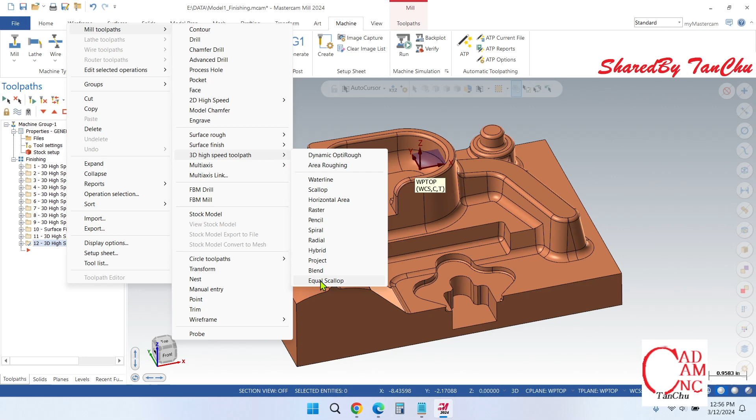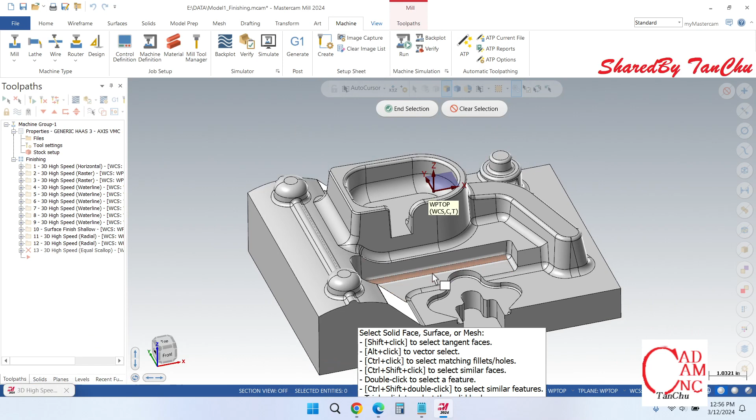I would like to machine this surface, the surface on the top only, and I will select Ctrl A for all surfaces for avoidance, and for the machine surface we select that surface and select it.

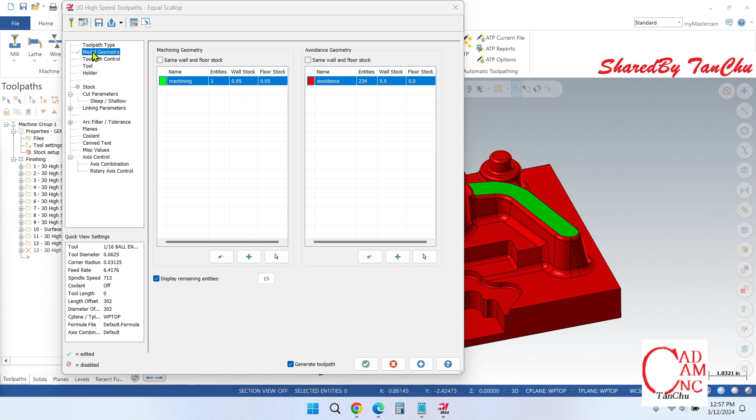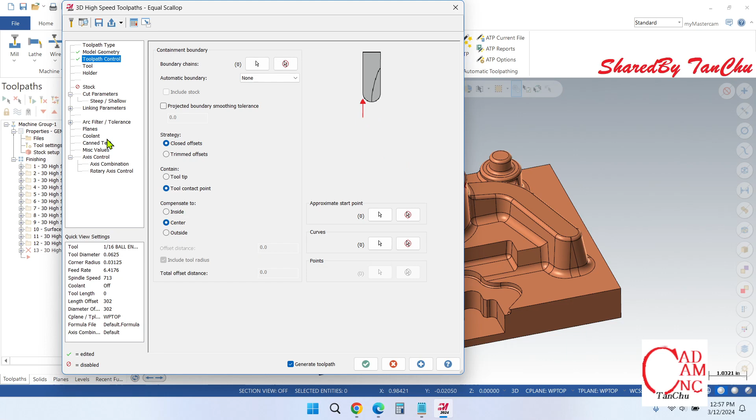The tool, closed offsets, tool tip. We can do at contact point, we call it angle, maybe it's not always on the tool tip, and center and tool. I'll do the quarter inch ball, we do quarter inch ball endmill.

SFM 200, spindle speed, 1.5 thou per tooth.

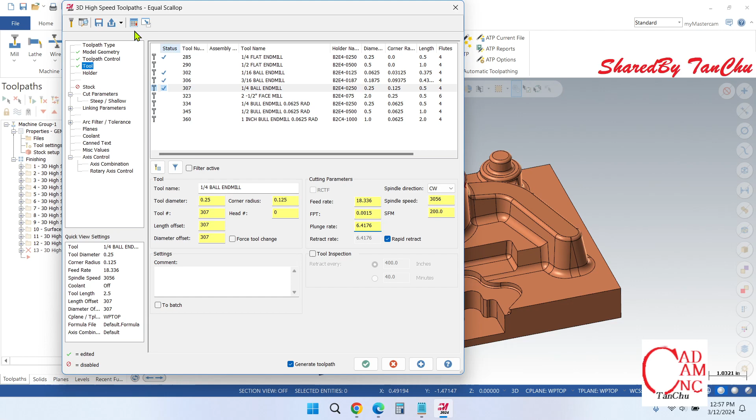The holder, keep this same, we don't need to change it, but actually we only need to hang out about 1 inch about this one, that's enough.

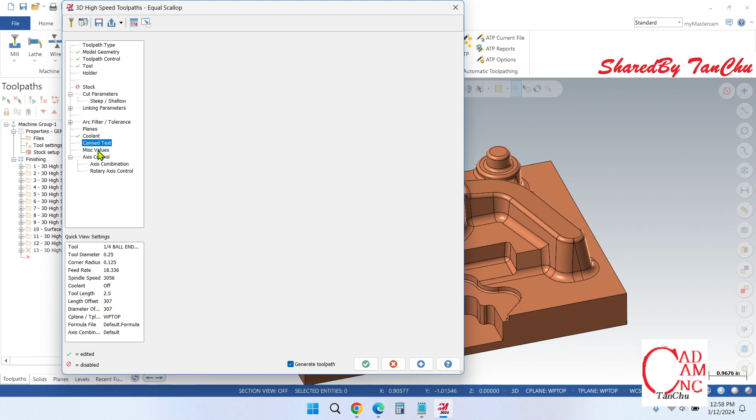One way first, one way step over, keep it first. Linking, I'll keep this, plane top, coolant on air, and regenerate it.

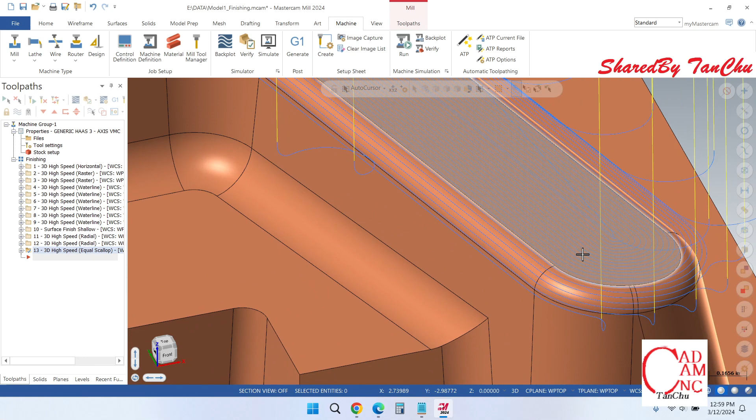That's how it runs over here, and I should make it smaller, or the step over, to make it nicer.

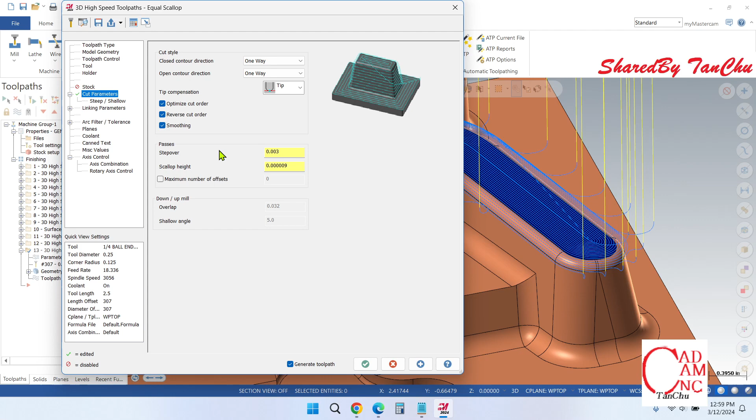This is the step over, I'll do 3. Scallop, and smoothing, we do smoothing, and this is run only one way, we run the down mill.

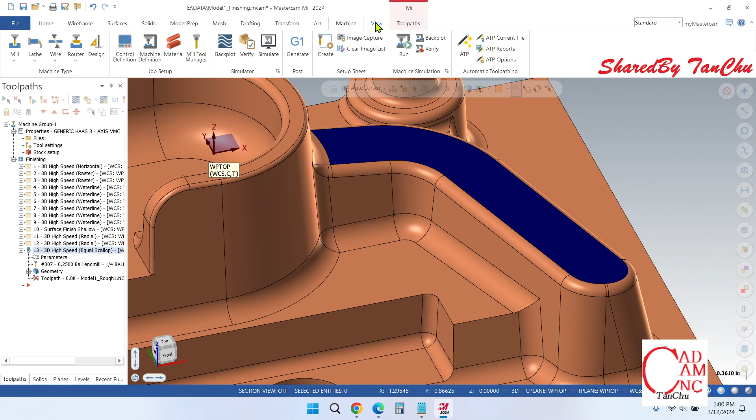Okay, it runs the multi-threading right now. Okay, really smoothly, very fine.

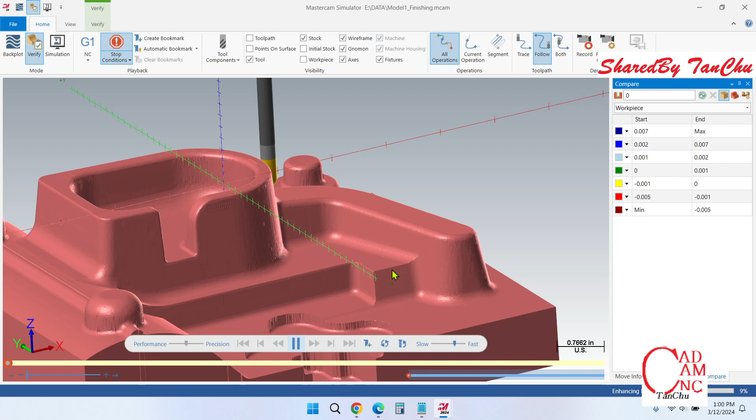This is a proximity alert occurring because it's really close over this. That's okay.

Very close, this one, I'll turn off this. It's only alert when a collision occurs.

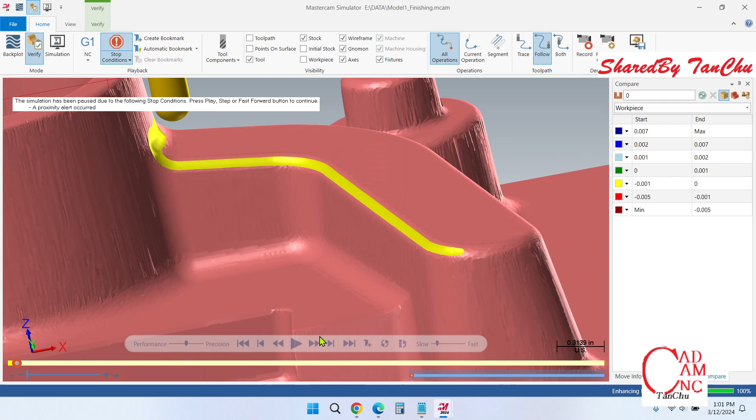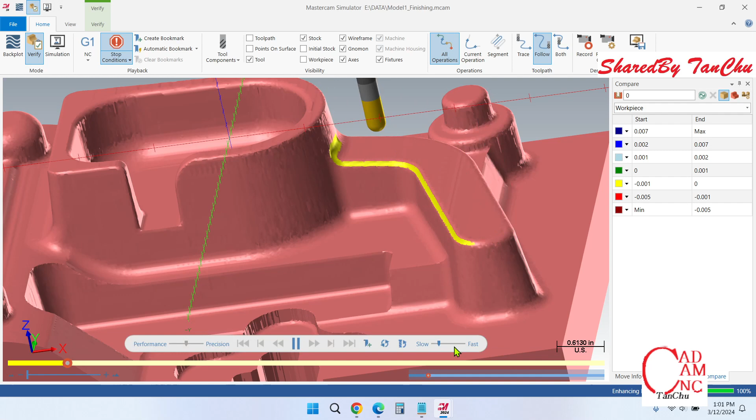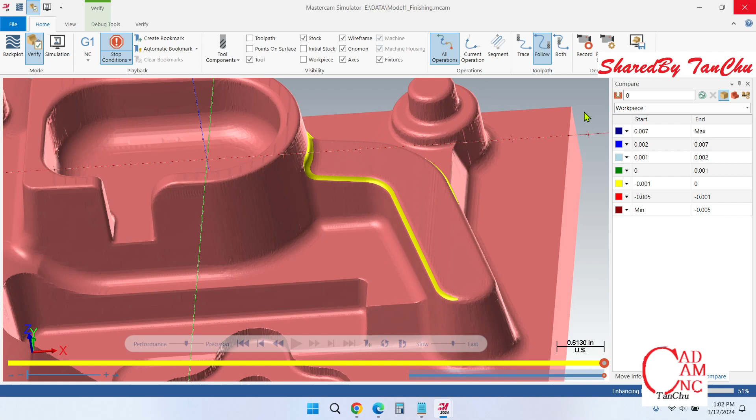It runs only from top down. And this, because I didn't see this one, it should be put at 0 over here for finish. Sorry about that.

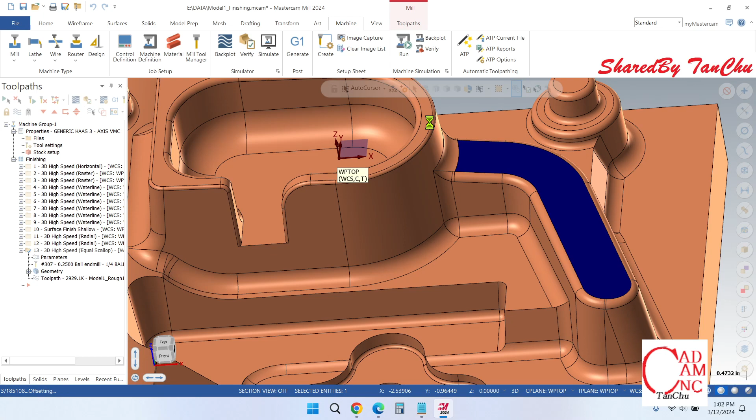Okay, and run the verify again. Let it run slow first. Here we go.

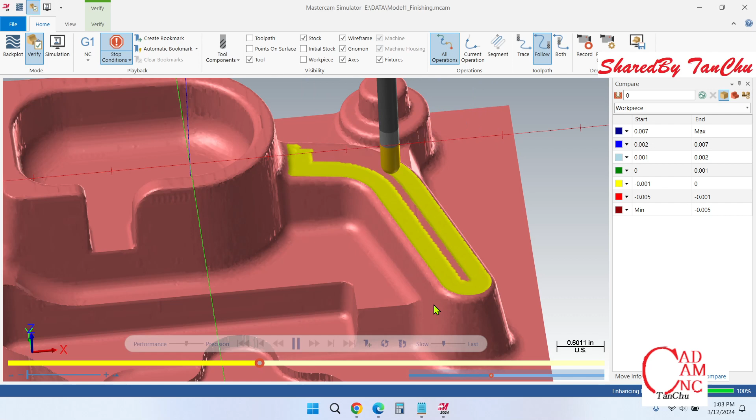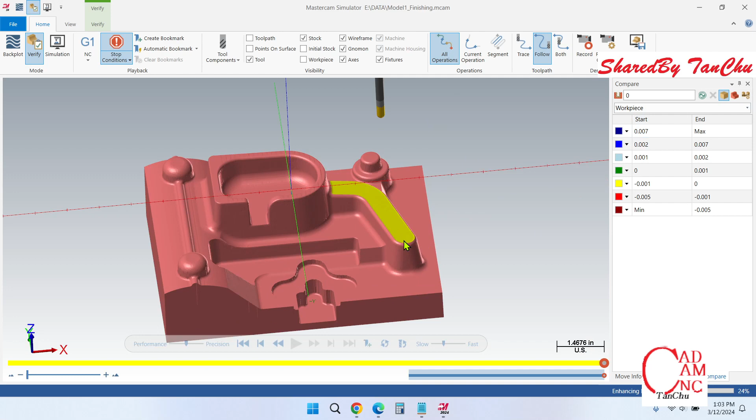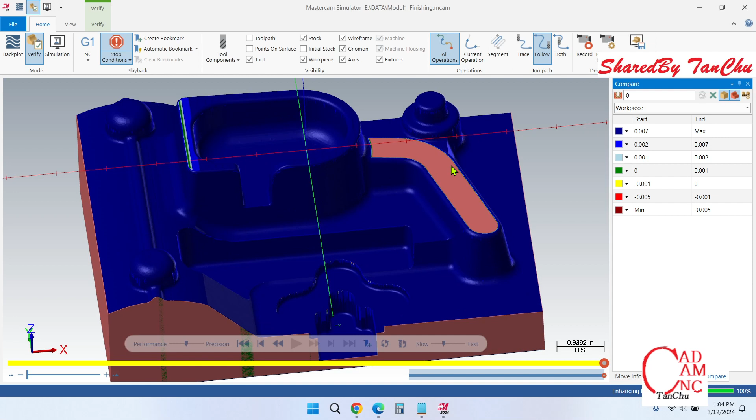That's the operation Equal Scallop. Thanks for watching.